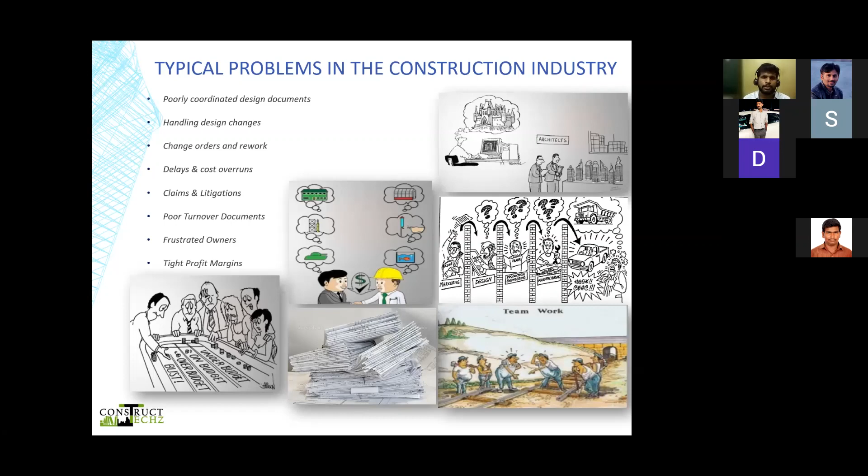So on that note, these typical problems have been first identified, and then there was a process or management which we have defined as building information modeling or building information management. So we have given these two definitions based on product and based on the information. One is based on the product, which is from Autodesk, about how the 3D model can generate plans, sections, elevations, perspectives or schedules out of a single source model.

Whereas it can also be said in the other way, that reliable decisions or focusing on the facility is what building information modeling is. So it can be taken in either terms. It can just be taken as a model. It can also be taken as a facility where you have decisions to make

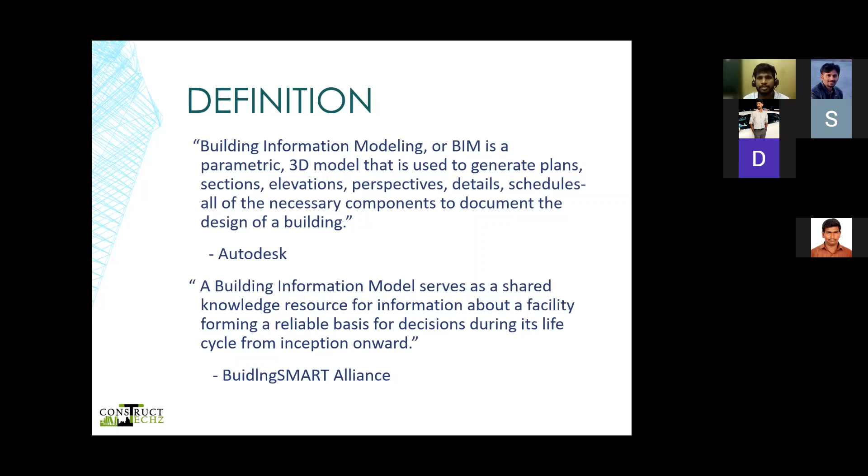throughout the life cycle. So the genesis has been from sketches to 2D drafts. From there we have switched to AutoCAD, and now we have BIM. So BIM is actually a single source model or a data source from which all the divisions involved in the construction industry can rely for information and derive information.

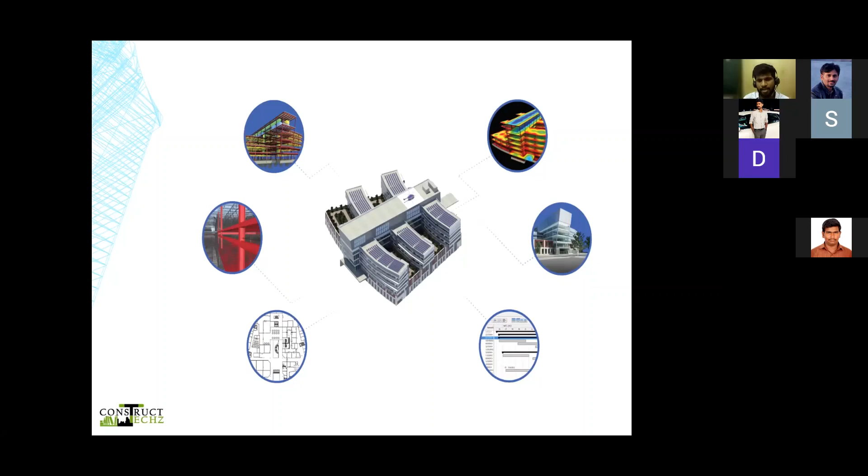So if you consider a facility, anything right from plans, sections for site construction, or for analysis, or for energy audit, or for scheduling the components, or to know the cost, to understand how it is being erected, the construction sequencing, everything can be derived from the single source model. So a 3D model along with the right information for construction and after construction is what a building information model is.

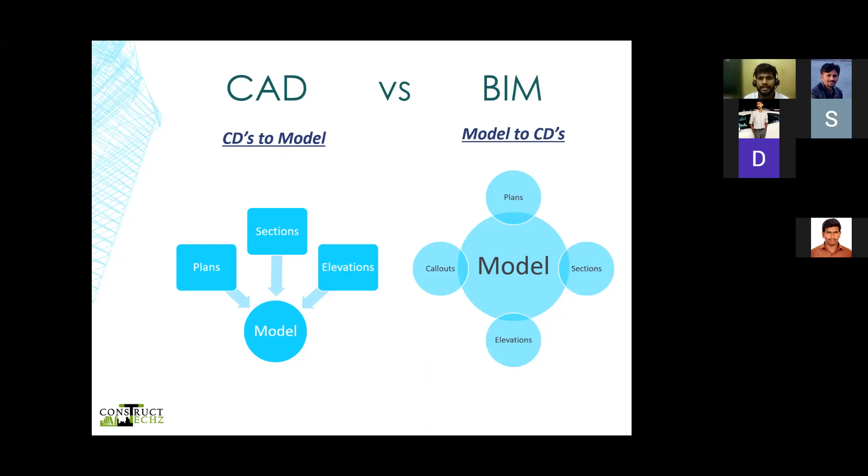And from there, you deliver the plan, sections, elevations, schedules and cost. So this is the difference in the deliverable we are now focusing on with BIM. This has been quite difficult for people who followed traditional practice, but it's slightly changing, where you don't think about call-out sections or plans, but rather the facility as a whole and its needs. This gives a better understanding for the client, the constructor, and the designer.

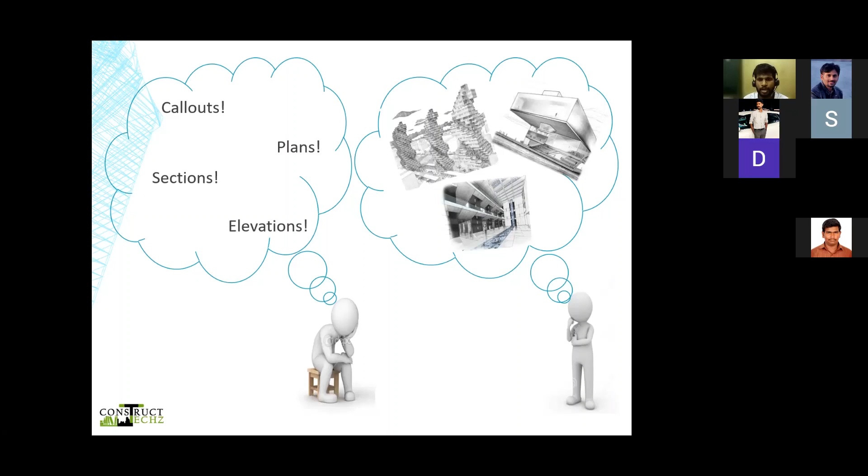So Venkat, can I suggest something? Just right click and select pointer options, then laser pointer. Okay, yeah, thanks. I'm not introduced much to Zoom, we have been doing it in Teams. Thanks for the update.

So moving on to parametric modeling. So far, the reuse of components or drawings is not quite common in our industry. That has been made easy by parametric modeling in today's world.

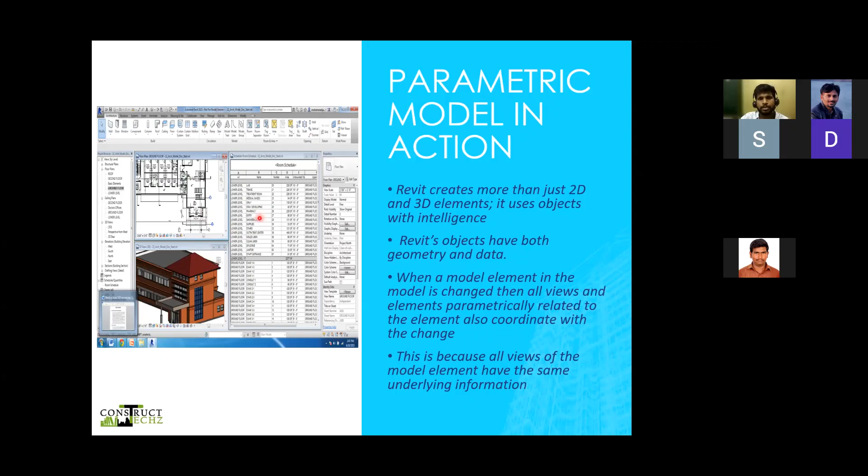This is a small depiction of Revit, where you can find the model, the respective plan sections, and the schedule of components. Any change in the model gets updated in the plan, and then in the schedules, and vice versa. This enables faster changes and better output in our model.

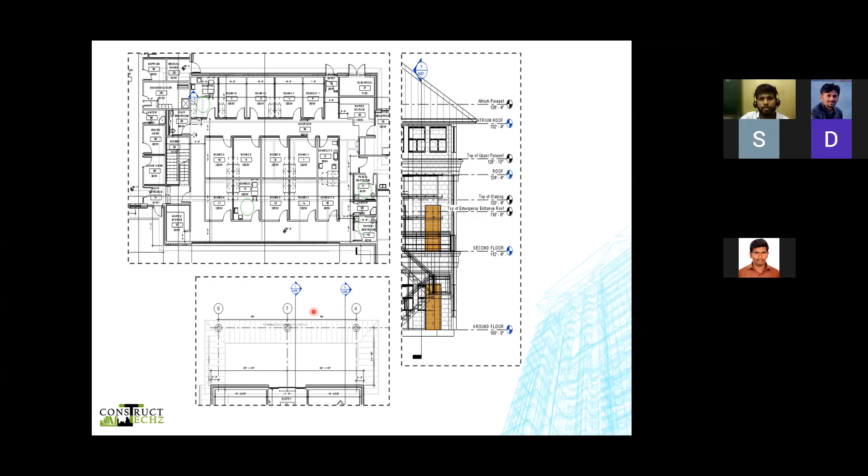For instance, there are levels which we create for elevations. In sections, again we prefer to create elevation levels, and then we have to specify the grids which repeat in different views. This is something we have been doing in CAD, a time consuming process where we repeat the work. Whereas now we just produce the grid, and with a click of a button make sure it is visible in the respective views we require.

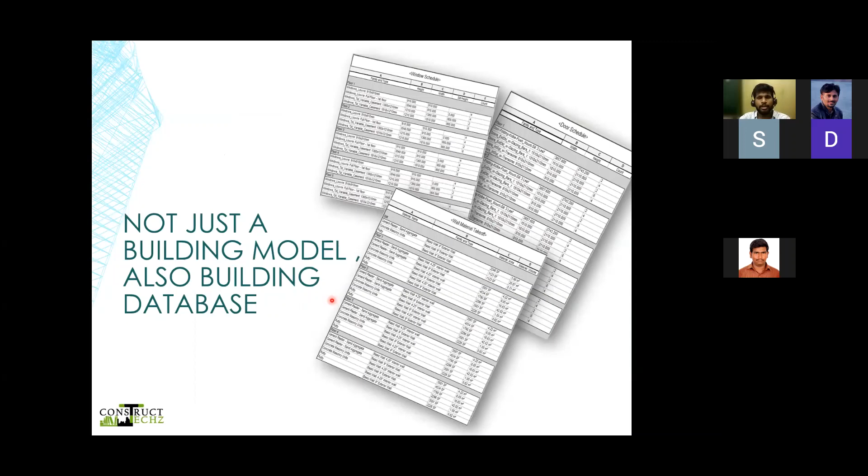In short, I could say the building model we are having is actually the database of the model. So when I say model, it can either be a building, a bridge construction, a marine structure, an offshore jacket structure, or anything of that kind.

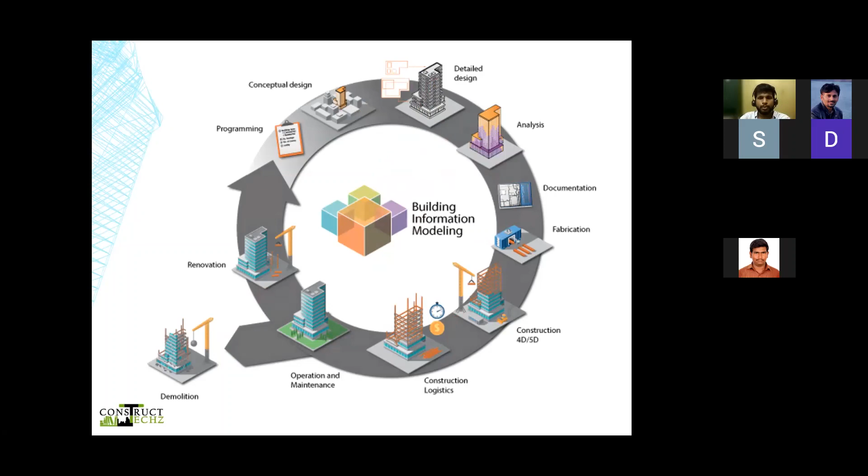So this building information modeling cycle is nothing but a model being centralized, and through this life cycle the single model is being considered for the entire process. This actually differs in the way of project delivery.

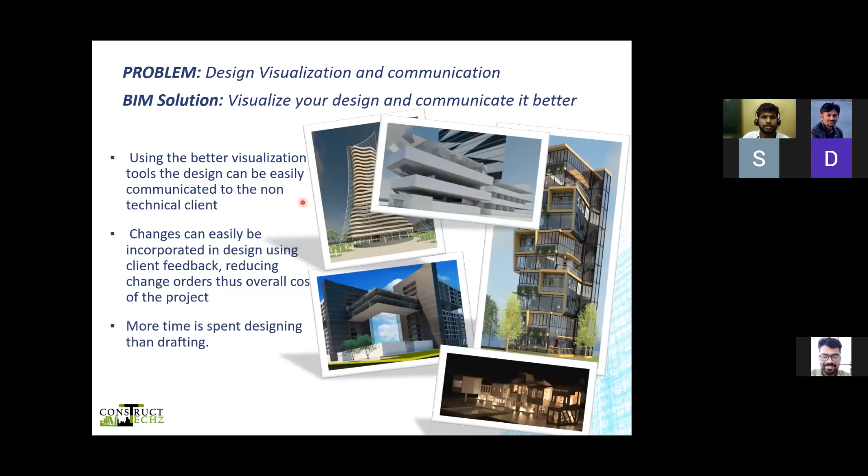So what would be the influence of BIM in the industry so far? What we have overcome in the past few years is visualization and communication. When we start to visualize things, it was a better understanding for people in different divisions to understand the actual output to be constructed on site. This way, clashes and coordination errors can be avoided. This improves visualization, improves the quality of construction, and avoids coordination errors.

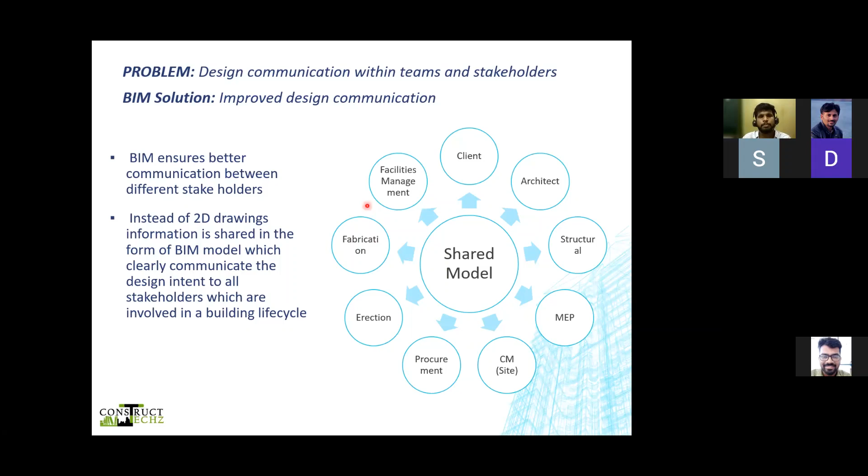Communication within teams, even between architects, structural engineers, MEP engineers, or site engineers, there might be communication errors we don't address in time. Whereas cloud-based shared models nowadays have made it super easy for people across locations to still have control on the model and the deliverables. This has actually improved communication between people sitting across the globe.

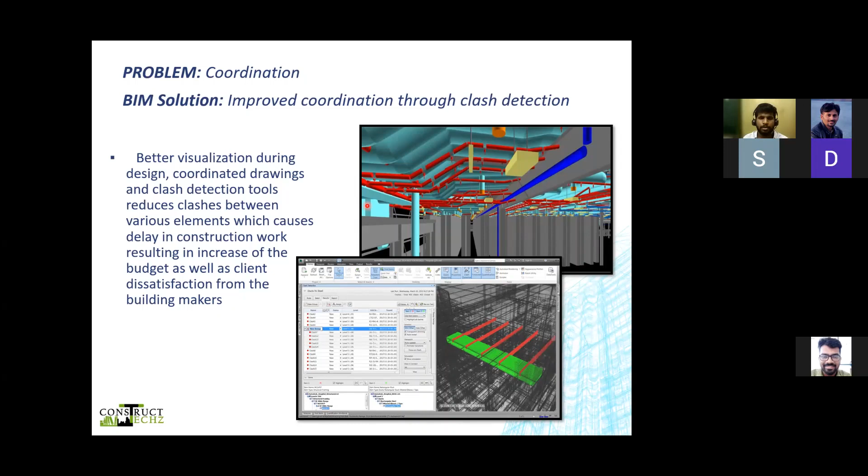Coordination has been a very major change we come across in the industry nowadays. Actually checking clashes beforehand during construction is what makes it a clash-free model in the future. When this is done, change orders can be avoided, rework can be avoided, time can be saved, and cost claims and litigations can be reduced.

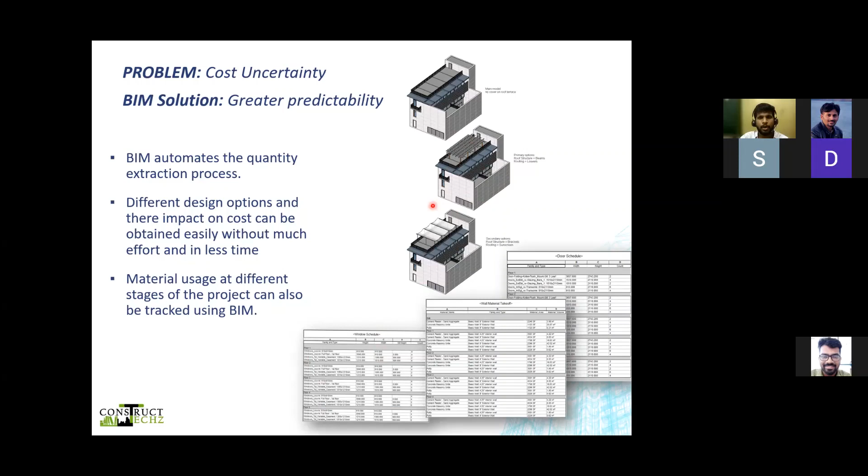Cost uncertainty is one reason we always have in budgeting construction. Schedules are made as per the model, and we have the right information from the right model we are going to place. So we can compare designs beforehand and give a cost estimate to the client beforehand, and he can decide upon it, and we can deliver accordingly. That has been a major plus point.

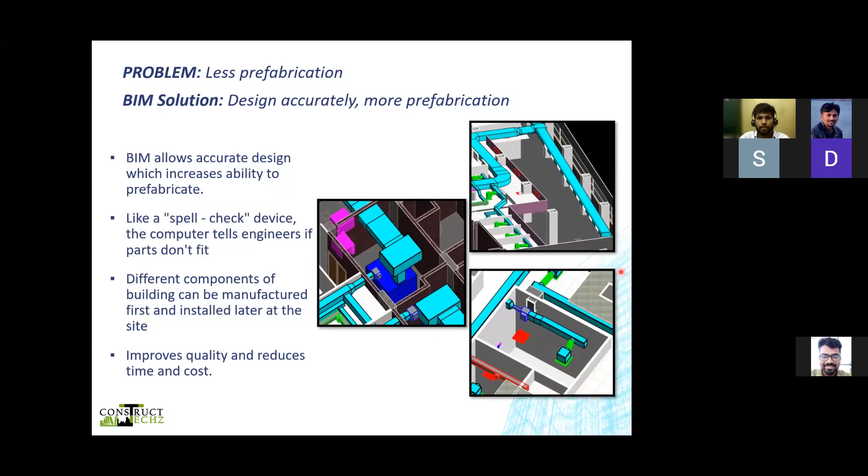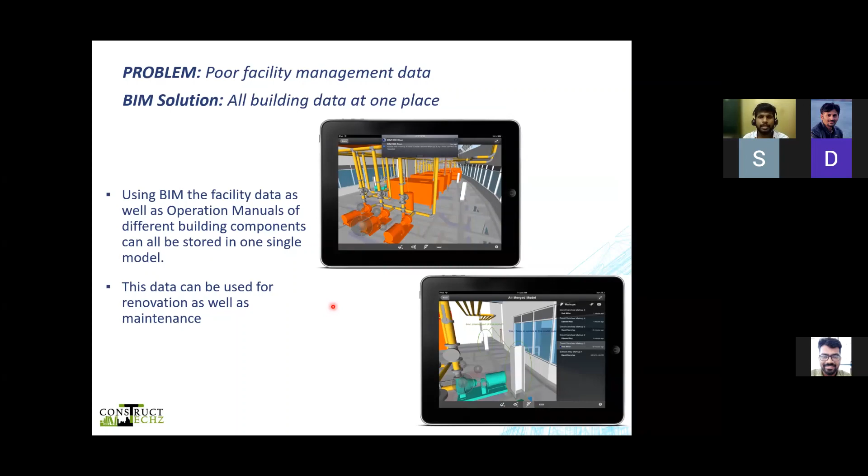Prefabrication has improved in recent times because the accuracy and precision of modeling and design has improved. The management data, which was always a problem, has now taken a step ahead, and we can visualize an empty space with the model we created in our 3D modeling tools, using recent trends of augmented reality or mixed reality. This gives the designer as well as the client the ability to virtually understand the building beforehand of construction and make changes then and there.

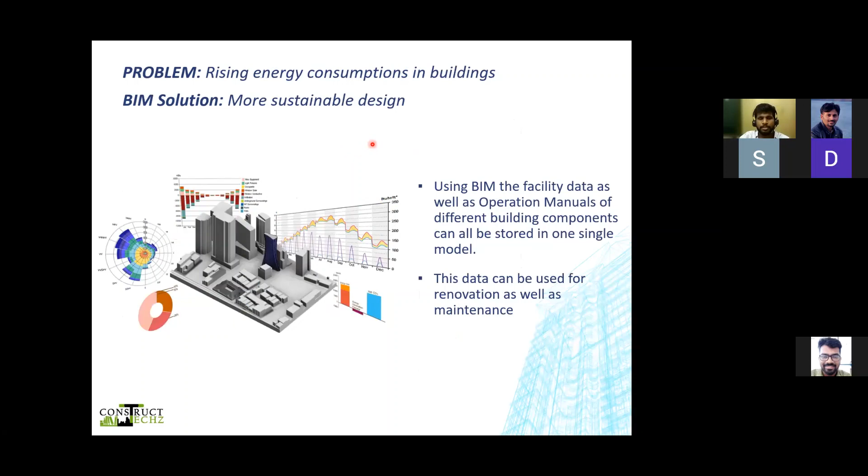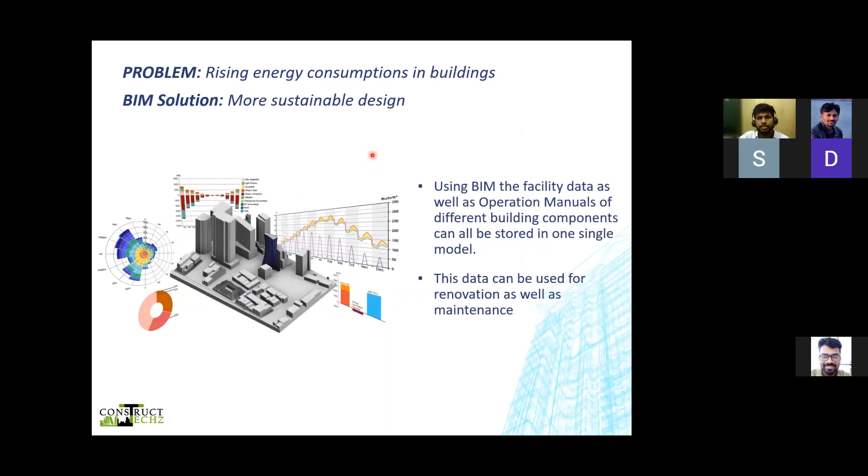Rising energy consumption has been a problem in our industry as well. The civil industry has been the major consumption industry of energy so far. So we can create more sustainable designs based on the 3D models, or based on the information we provide to the models. That was also a major solution.

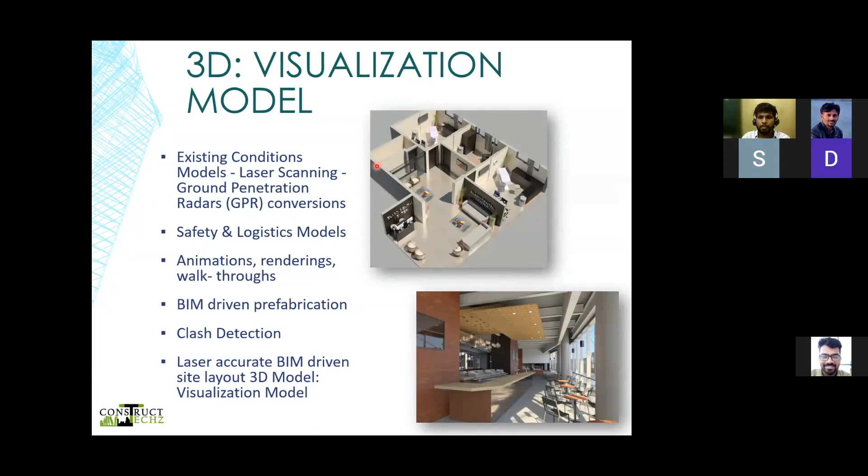With all these application solutions, BIM applications have been categorized into different dimensions. 3D is something we commonly know, which is for visualization of the model and understanding the actual model in place or in construction. When you step to the next level of BIM, it is 4-dimension, which is the time-based model, where the model and construction sequencing come together.

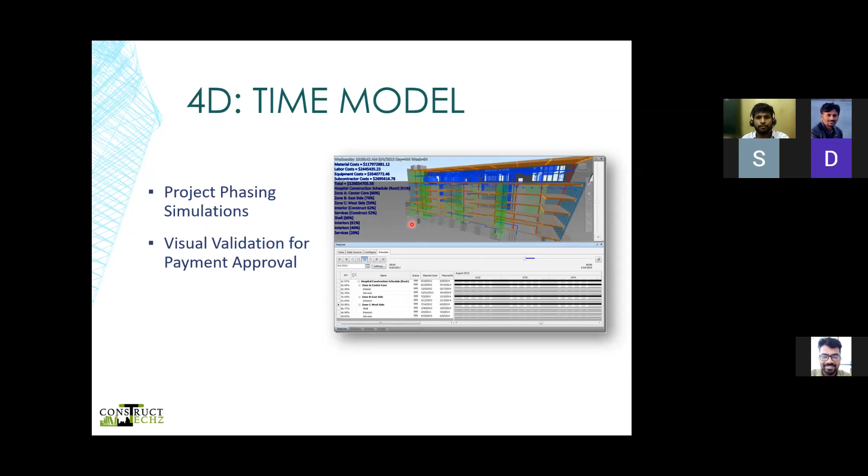We do project management using Microsoft Project, and also using Primavera tools. When we have these tools to create schedules of construction, we can link with our model and check the timeline based on the model construction. This helps us in following up the construction so it can be made on time.

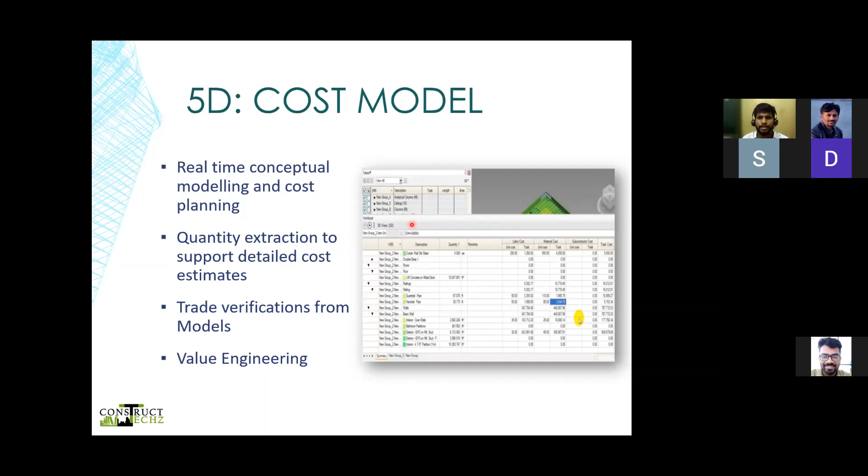There is the next, 5th dimension, which is the cost-based model. Any component in the model we have created can be linked with the resources required: men, material, money. These are the 3 major resources we have to look into during construction for any component in our facility.

That can be linked, and for each component in our construction we can really understand the cost of it. 6D is the energy dimension of the model, where we can check the electric consumption, water consumption, and total energy consumption. We have HVAC analysis, airflow data, and climatic analysis based on the orientation of the model. All this has been possible only because of using a single source model throughout the life cycle.

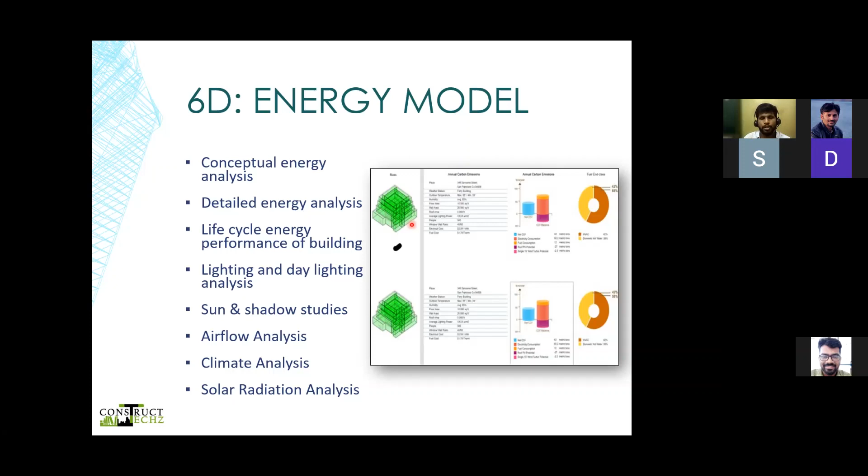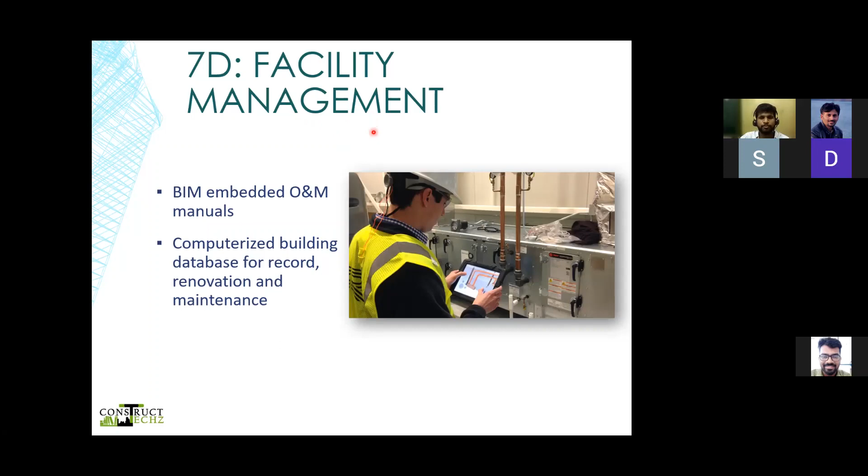The 7th dimension we have is facility management. This has been a very big area of interest, where we have pipeline industries, oil and natural gas, and commercial industries. They have made the best use of this facility management, if not for residential buildings, at least it is majorly used in other industries where facility management is of major advantage.

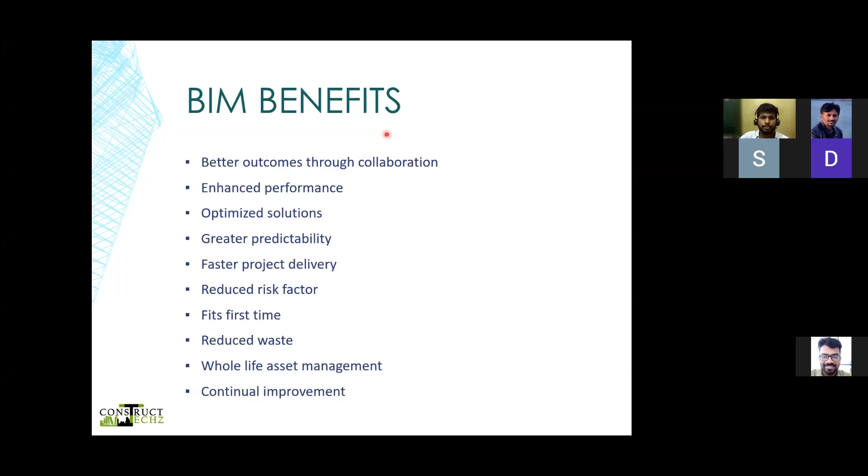Overall, I could say the benefits have been better collaboration, enhancing performance, optimizing the solutions we have, delivering at a faster rate, and reducing waste. In project management study, we have agile and other techniques to reduce waste and do construction in an efficient way. BIM has stood out in a way that it has given a really positive note to the construction industry, where major wastage has been reduced during construction, and it has been proven. So that's talking about how this workflow in BIM works.

So far what I have said is what is BIM and how it is helpful, and what it can influence in the projects. So basically how BIM works in the industry is people from different divisions create their model, they collaborate or refer other models.

Basically it's like AutoCAD XREF, where we just link the drawings to other drawings as a reference. Here we do model references directly, which gives us a collaborated model where we can see architectural, structural, and MEP components together in place, giving a better understanding of the actual real scenario model, which is nothing but the facility.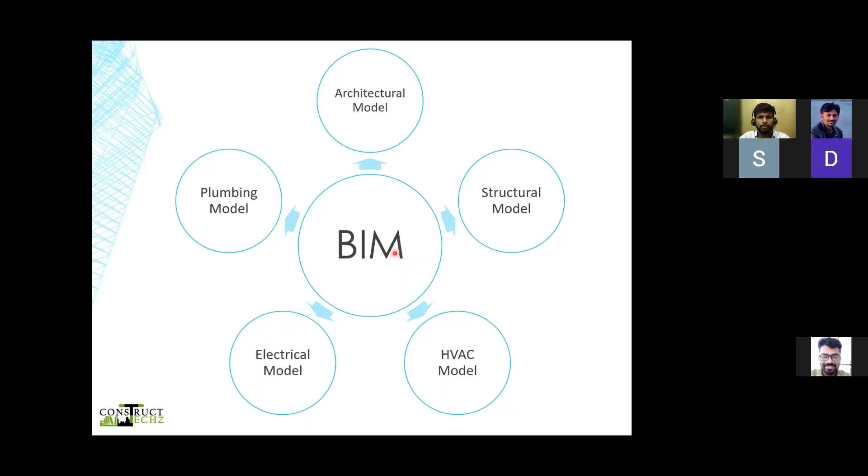So this is one of the first and foremost setups we have to have in order to begin a BIM project. Then we have to define what is the level of detailing or level of development we need to have in the model.

So there is basically conceptual design, preliminary design, detailed design, the construction output, and then we have the as-built. These are the set of stages where this level of detail or level of information varies.

For instance, if there is a column, to represent it we can just provide a rectangular or circular element with some length. So basically it's just length and the cross section dimension of the column, and this could be required actually in conceptual design.

Preliminary design has the information of the dimension, then detailed design has the information of the concrete grade and the rebars involved, and then we have the construction design where we provide details of the bar bending schedule and all the relative information to be constructed on site.

The as-built drawing is the drawing we deliver to the client once construction is in place, and everything on the document is what is built on the site. So that is how the as-built works.

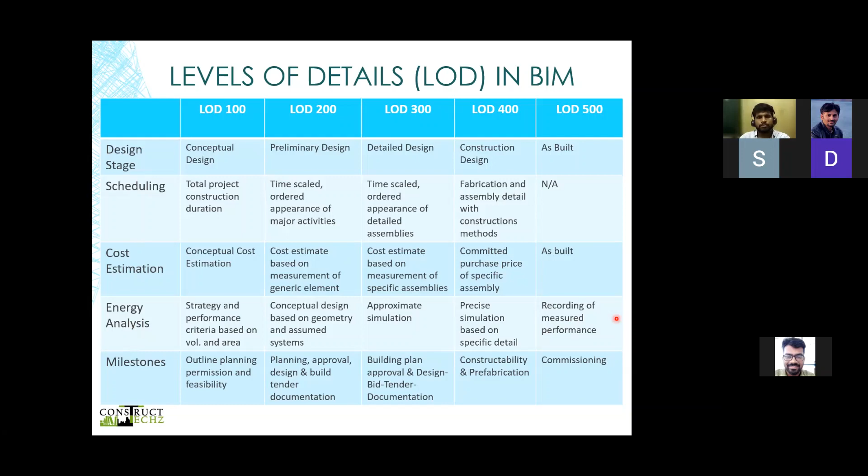About project management in BIM, we always have a scope, and the scope definition has been improved in recent times, where the client has defined it more precisely because of better understanding, and the contractor or consultant can also deliver it with more clarity, as it is quite visible, or transparent for both the client and contractor.

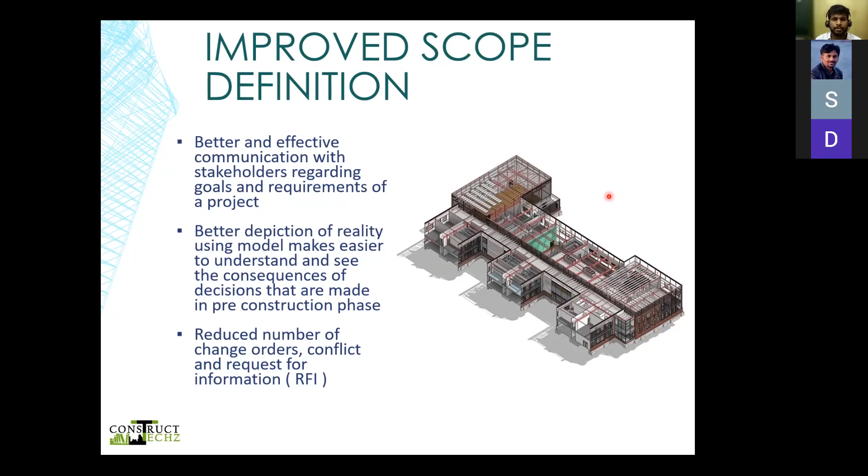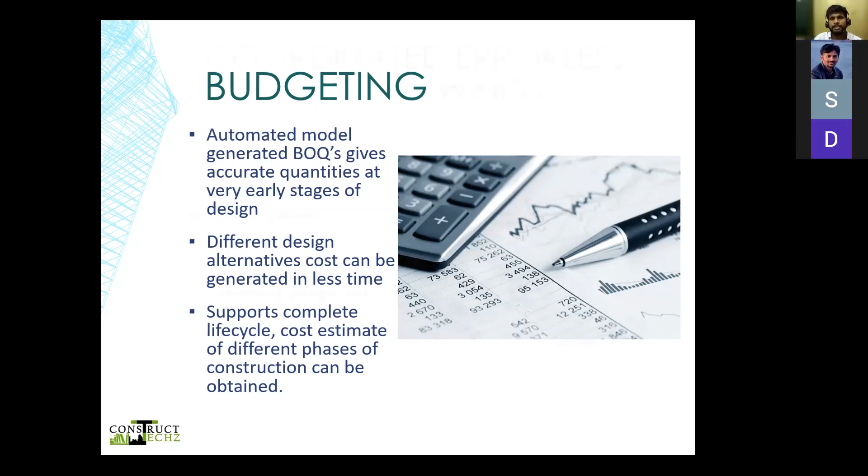So budgeting beforehand, even models have been created during the estimate stage to get an overall understanding of the budget, which was previously done manually. We still do manual calculations, but we try to compare with models, which gives us precise information. There is a variable tolerance of plus or minus 10 to 15% in different construction based on the overall budget. That was one of the advantages we can compare with.

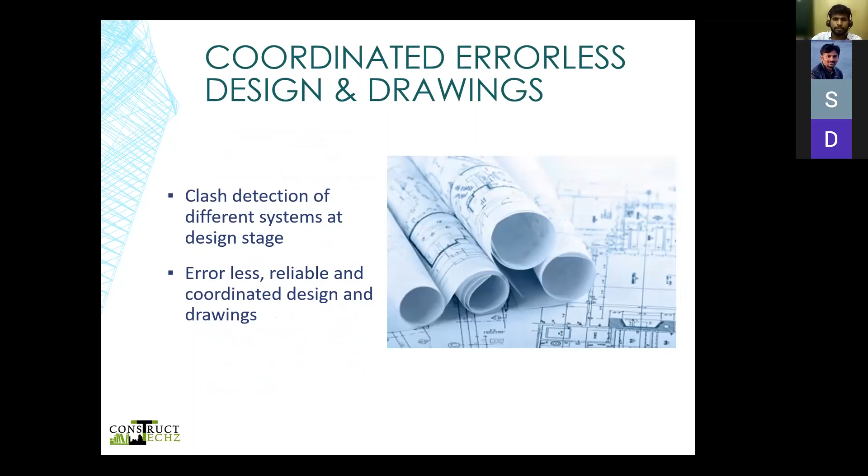The coordinated design is the major outcome of BIM with respect to project management. And yes, the site planning.

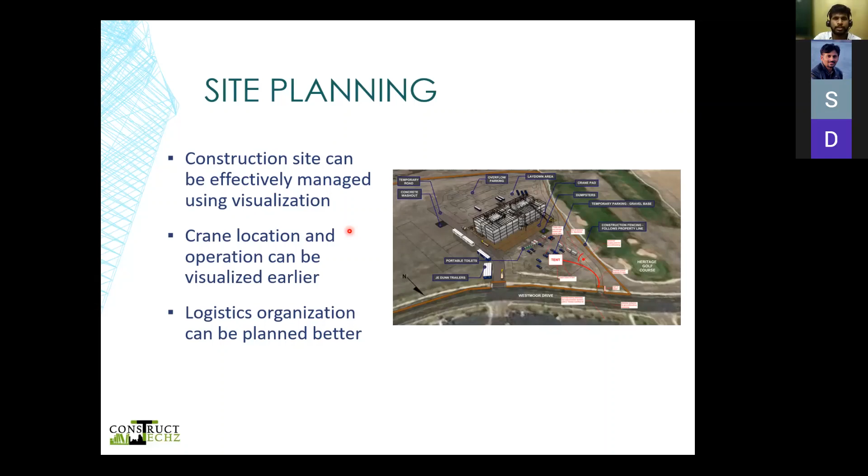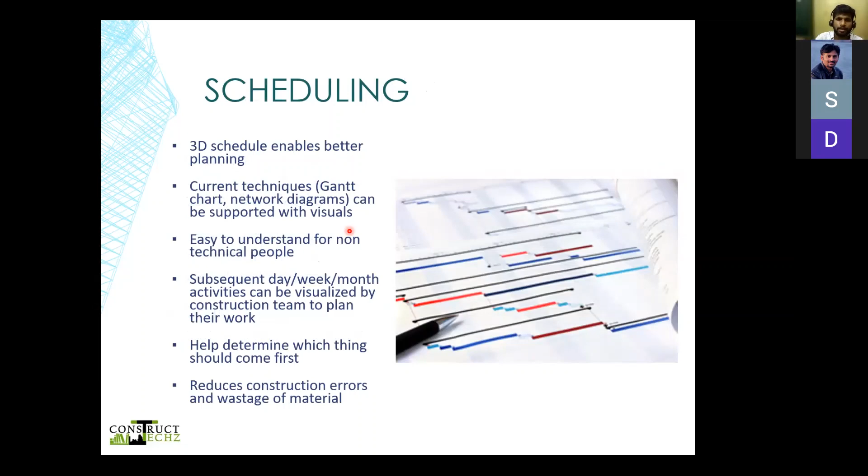Real-time construction has been quite easy with the help of using map data with large datasets, where we can do a miniature modeling of a building up to a maximum of infrastructural modeling, where you can go for kilometers and still understand how it works in real time. This has improved the idea of planning, and scheduling was one of the important functions we have harnessed in this BIM project management area.

Procurement management has also started using the build 3D model or the BIM model, with which they have identified the amount of material, and they know how much material has to be procured upfront and during construction based on the model scheduling we have provided them.

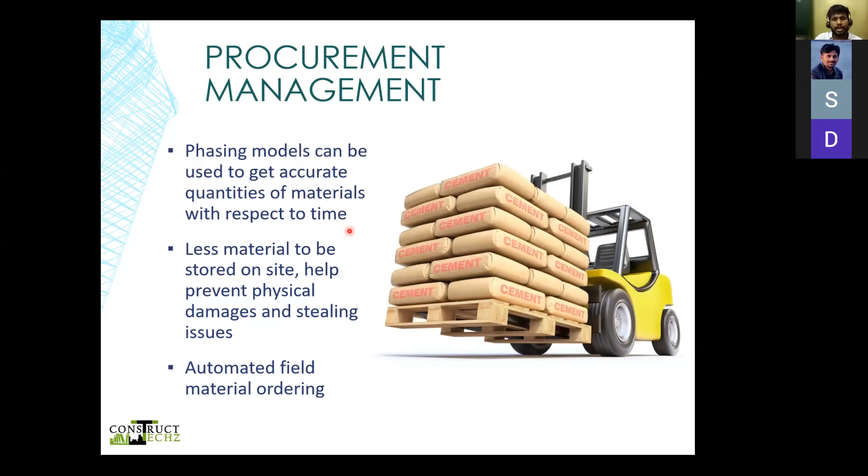Risk management is something we can call the 8th dimension of BIM, where we can understand the safety of the labors and construction safety, constructability, possibility, and risk factors during construction, which can also be done during the model phase itself.

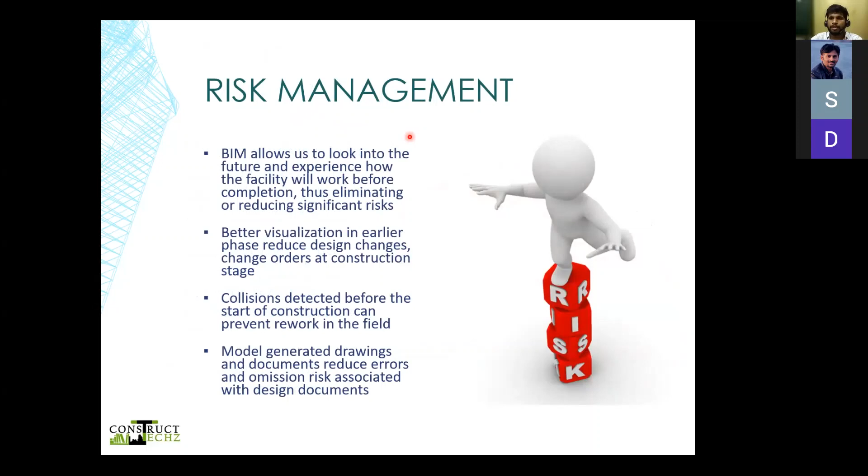And yes, as we have already said, based on the energy aspect, we have reached the sustainability aspect also in understanding the facility and getting more sustainable outcomes, which will also help us in getting LEED certifications in future.

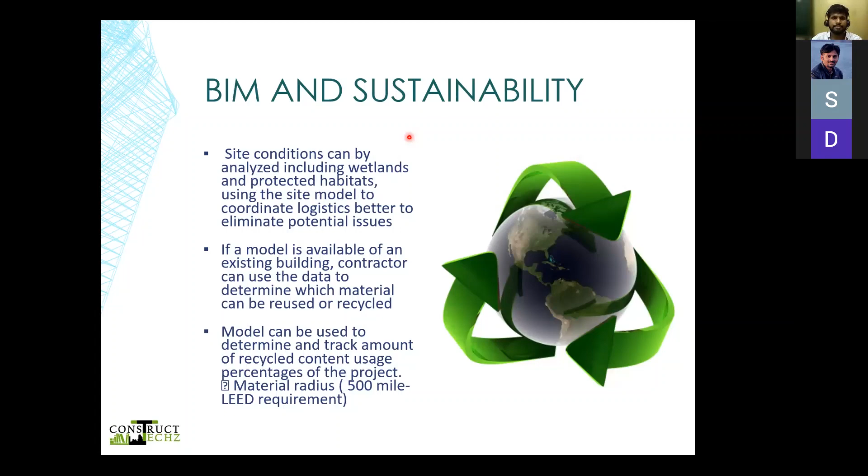This is just a quick walkthrough on who, or what people are actually involved in the BIM industry. As I already said, it's architects, civil engineers, mechanical engineers, electrical engineers, and energy consultants.

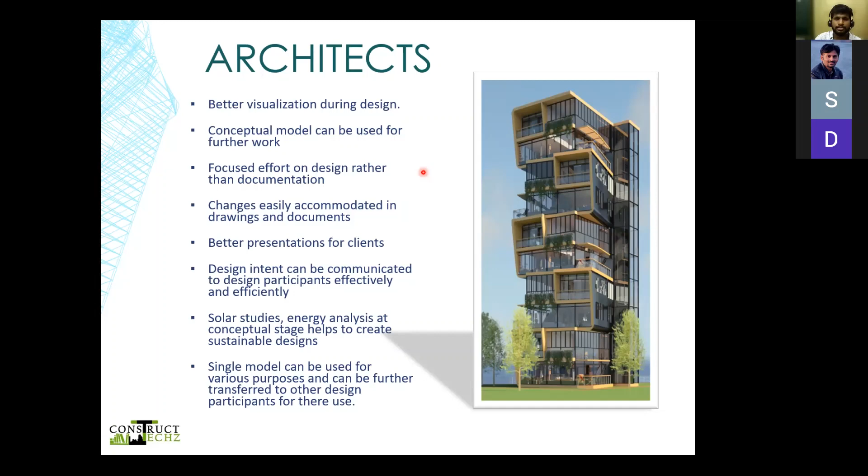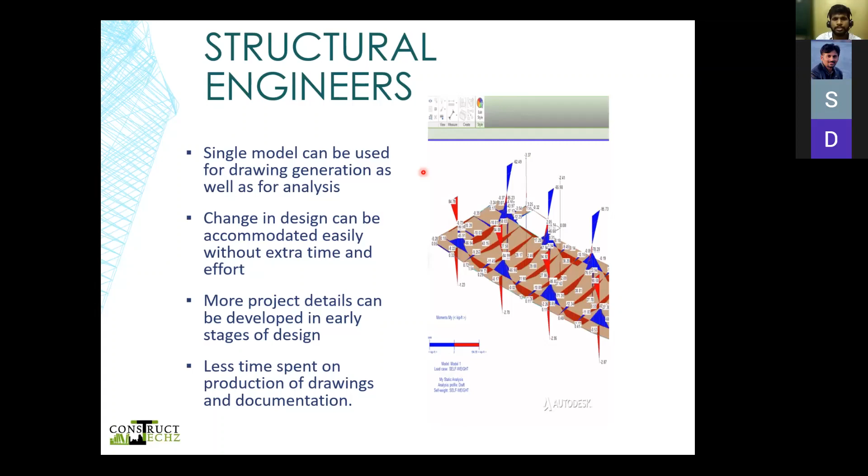For architects, they have their own set of benefits, and structural engineers can get the analysis done quickly with the model. There's no different models being created; it's the original model initiated by the architect, with positioning of columns and beams done, and that is transferred to the structural team where they do the analysis, make changes, and then deliver it back to the architects, with or without changes. It's a single model that goes through this whole process.

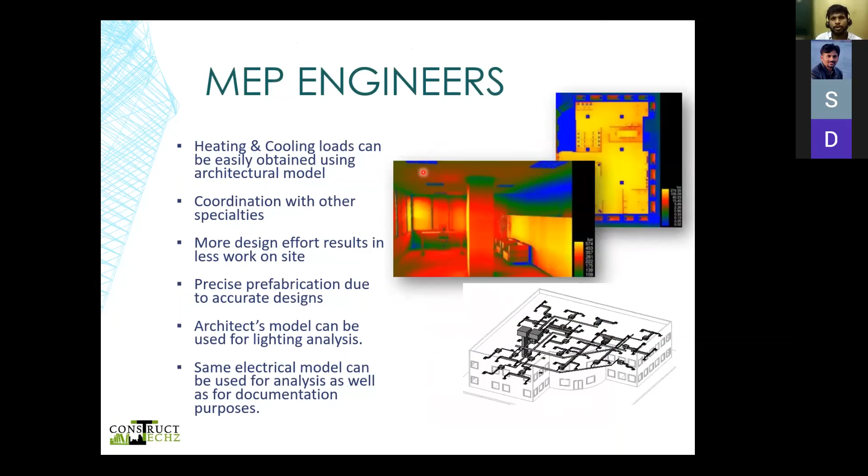For HVAC analysis, in order to understand the plumbing routing, pipe routing, conduit routing, and electrical routing, everything is based on the architectural model initiated by the architect. The model is shared between teams to deliver their own designs. The base model is the architectural model, and the MEP team designs on top of it, running ducts, conduits, and AHU units, planning it better and coming up with better solutions.

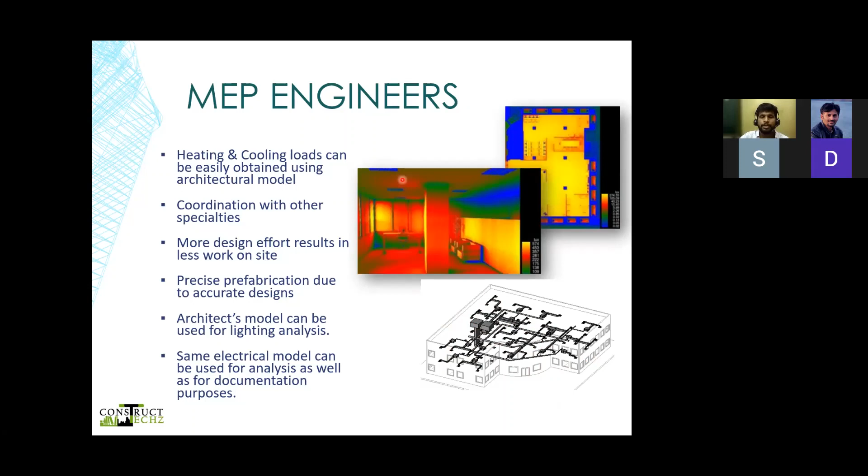When there is a false ceiling, there might be clash detections in the model, such as pipes running below the false ceiling. These situations have been overcome through visualization and coordination, so such errors can be avoided.

So that covers the fields or industries involved, and the people who can be part of BIM.

Now talking about BIM standards, we have been following NBS Uniclass 2015, which has been upgrading its standards and classifications for modeling. There are other codes based on British standards. These standards were initially prepared for specific countries and later used by other countries with certain changes. So these are codes or standards which have been initialized and improvised to meet market requirements in other areas.

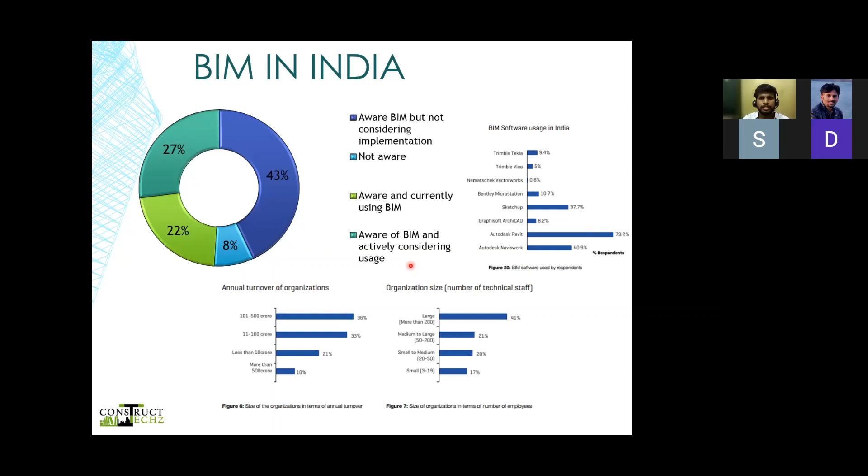So you can't deny it, or if you deny it, you can't be in the market. That's one reason people are focusing on BIM nowadays, and it can be used as an opportunity for people eagerly looking for a chance to get into the core industry in either terms.

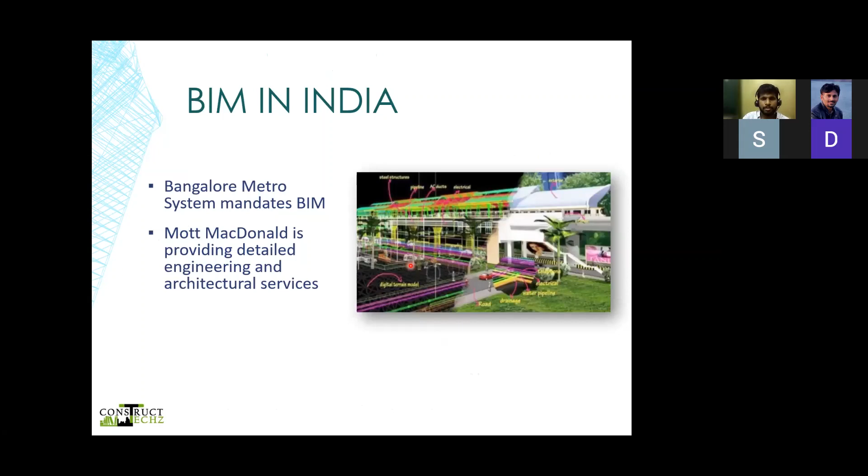I'm showing you some of the major projects which have recently initiated BIM, like Bangalore Metro, done by Mott MacDonald, and Chennai International Airport expansion, done by L&T and Nagarjuna Construction with BIM as a base. We also had some power plants in India, government projects, which have mandated BIM.

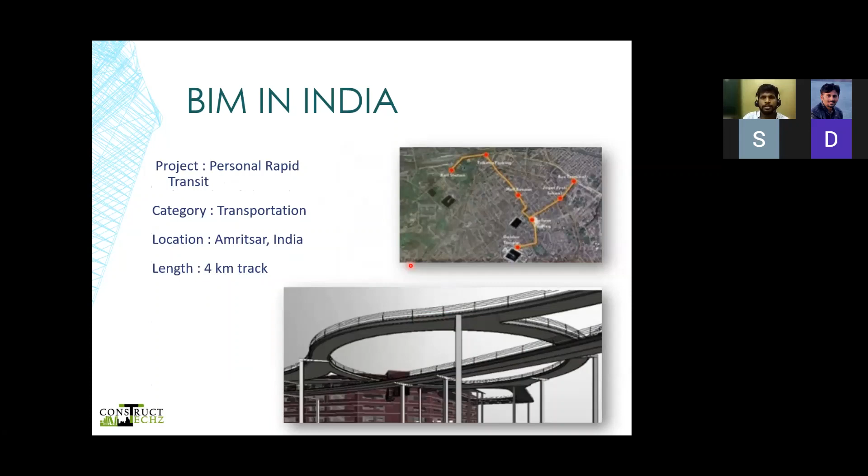Recently, we had a chance to work on a few projects where the government has mandated BIM under a clause where it has to be used in the deliverables. So it's basically the understanding of the government that they have understood the use of BIM in recent times.

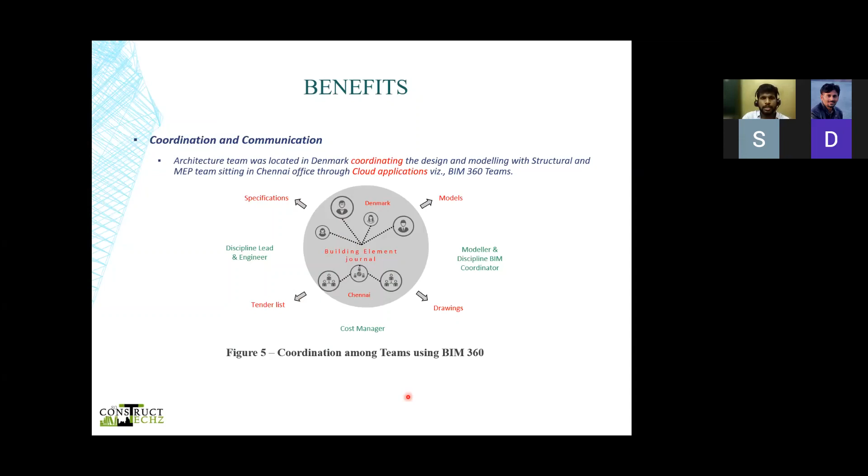So yeah, this was my project case study in our own construction. This building was actually constructed in Aalborg in Denmark, and we just had a small comparison of how BIM has benefited us in this. We basically use cloud applications, as the BIM team is residing in India and the design architectural team is in Denmark. And that itself is one part of BIM management, using cloud collaboration to communicate and collaborate on the model between locations. So locations don't matter nowadays with the advancements we have now.

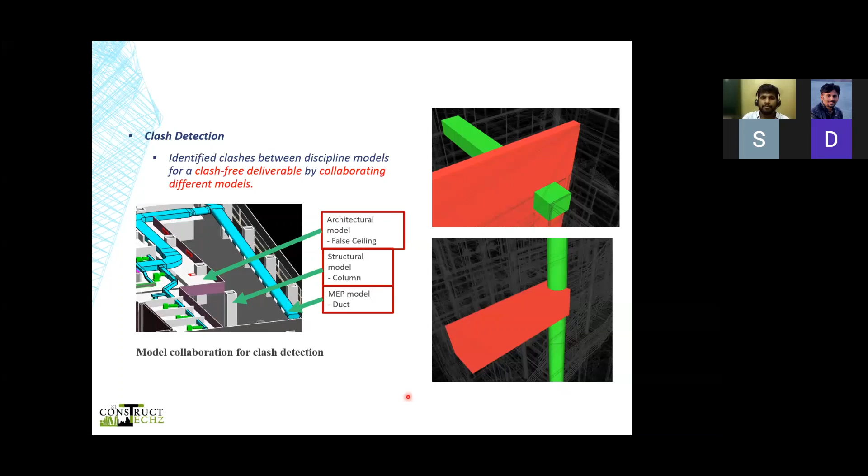So there were clashes identified, and such clashes would have cost us more, and that was calculated based on the change order values and the calculations we have between the client and the contractor. So we have actually identified it has helped us prevent 45 major change orders in total, and the total cost, in Danish krone, is 104,871 Danish krone. So this is just a small idea to show that when you start comparing the usage of BIM in real-time projects, this could be some value which you can actually compare and see in reality.

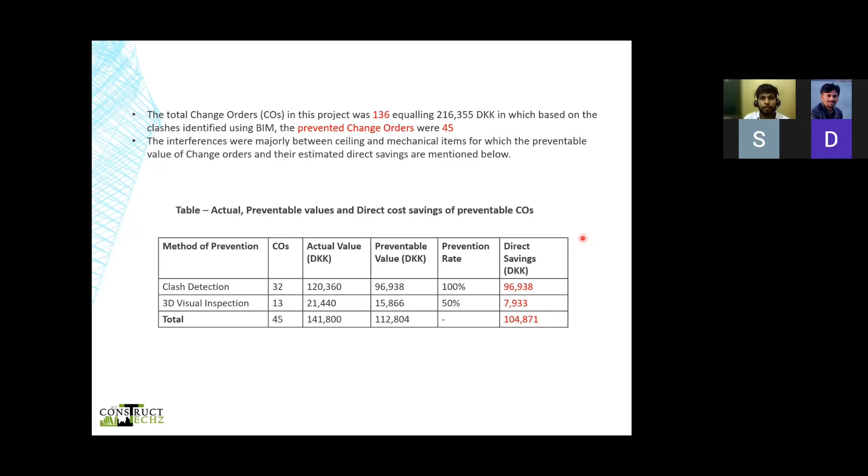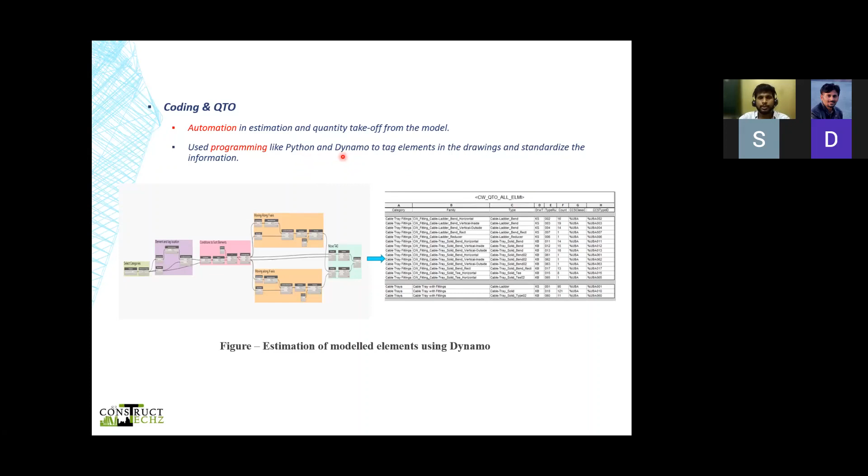So it's not just modeling, even certain conditions have been done for the betterment of the modeling. If it takes time, what has to be done in order to make it faster? That is where Python and Dynamo programming come into the picture. So these are areas you can actually focus on, and this will help you stand out in the market in the future.

So talking about the opportunities, we have a lot of positions now. It varies between ventures or companies and the projects we deal with. In general, we have the project manager, which is the BIM manager, who coordinates with all the disciplines, and there will be a BIM coordinator who coordinates multiple disciplines. At the same time, there will be coordinators for individual disciplines. A coordinator coordinates information between the BIM technicians or BIM modelers in the team. BIM modelers will be more in number, and they get coordinated with the help of the BIM coordinator, who deals with the client and receives information. So there are different levels based on experience and your understanding.

And then we do have subcategories, like associate BIM modelers who work only on individual design modeling, who are well aware of individual tools like Tekla, Revit, Civil 3D, or MicroStation. It could be AECOsim. There are a lot of tools nowadays in the industry. You just have to find the right tool, master it, and then you can get the right opportunity in the industry. With respect to the hierarchy, I could say it would be BIM manager, BIM coordinator, BIM modeler, junior BIM designer, and the CAD persons who help them finalize designs.